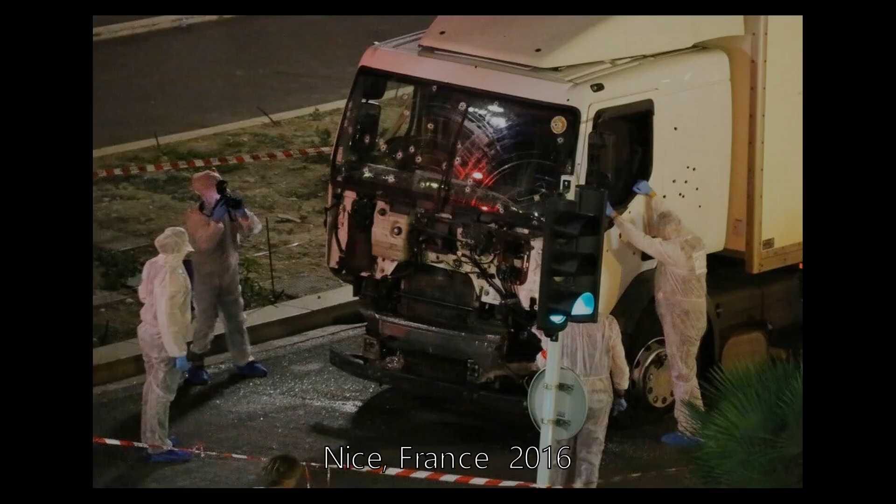July 14th, 2016, Nice, France, 10:33 p.m. A white 19-ton cargo truck is deliberately driven into crowds celebrating Bastille Day, killing 87 and injuring 458 people.

This tragic attack is not isolated. It is known as a VAW, or Vehicle as a Weapon attack, and we can cite many more examples over the past decade, including Berlin in 2016, London and Barcelona in 2017, and an example closer to home, Toronto, specifically on Yonge Street in 2018.

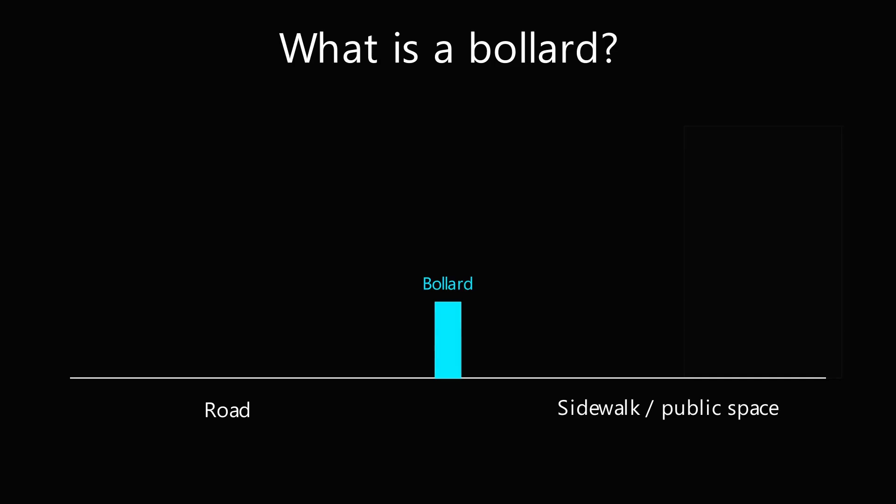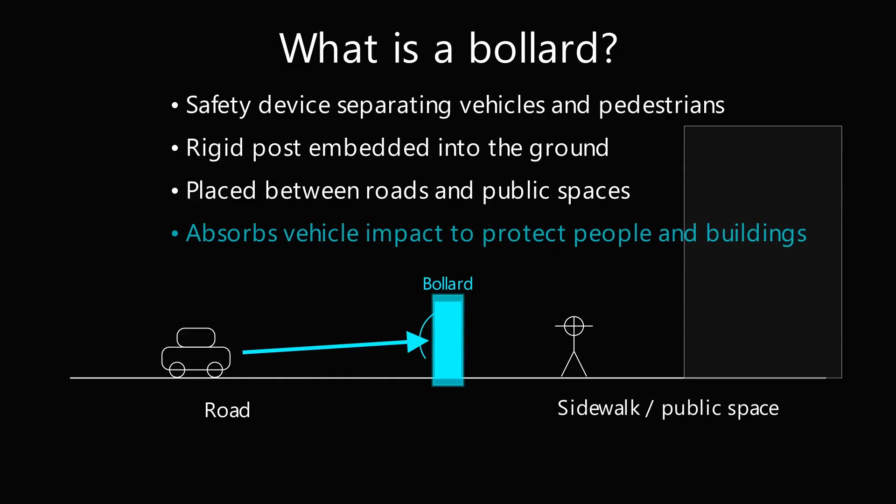One of the simplest ways to mitigate these attacks is by surrounding public spaces with bollards. A bollard is a safety device that protects pedestrians from vehicle traffic, usually a pole embedded in the ground between a road or parking lot and a sidewalk or public area with foot traffic. The idea is that the bollard will absorb the impact of the vehicle's collision and stop the vehicle from damaging buildings or hurting people.

Bollards can be made out of various materials based on various factors such as the number of uses, the impact force to be withstood, the conditions the bollard would be exposed to, etc.

Bollards are sometimes made out of concrete, but concrete is highly brittle, has poor energy absorption, and its quality tends to be variable because of mix, curing, cover depth, and rebar placement in the concrete.

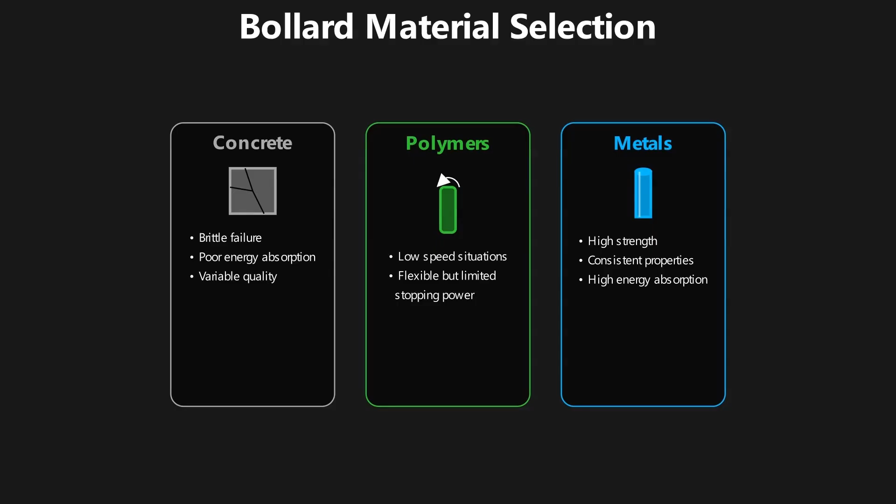Polymers, on the other hand, tend to be for low-speed situations. They tend to deform and then get back into place below a certain speed. Therefore, we are conducting our study on metal bollards.

Several standards define vehicle impact performance for bollards, including ASTM F2656, F3016, IWA14, and the legacy U.S. Department of State K ratings: K4, K8, K12.

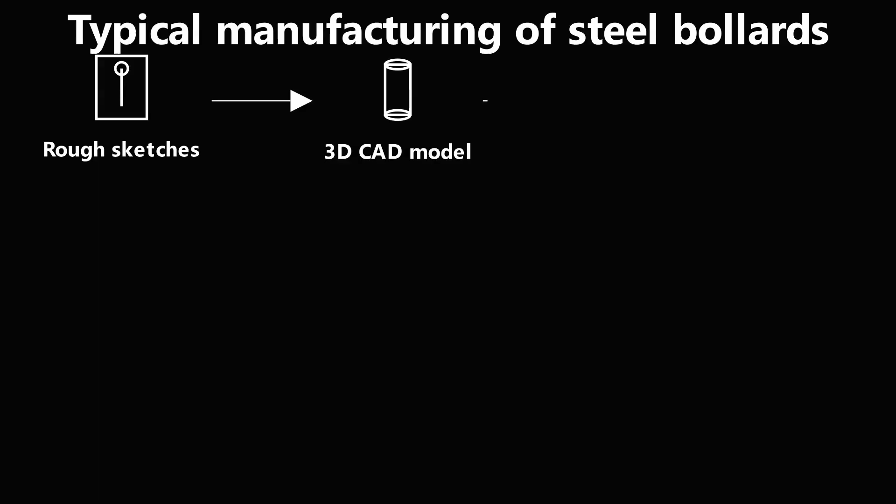The design phase of bollards is pretty typical, starting with rough sketches, moving to 3D models. Then, after the prototype withstands the proper impact resistance and load testing, the bollard is manufactured.

The steel pipe is usually the raw material. The base, cap, and fixture are usually machined and MIG welded to the pipe. The bollard is then inspected for quality. Finally, the bollard is galvanized and given a powder coating for corrosion resistance. Lastly, depending on the application of the bollard, a layer of bright paint is added for visibility.

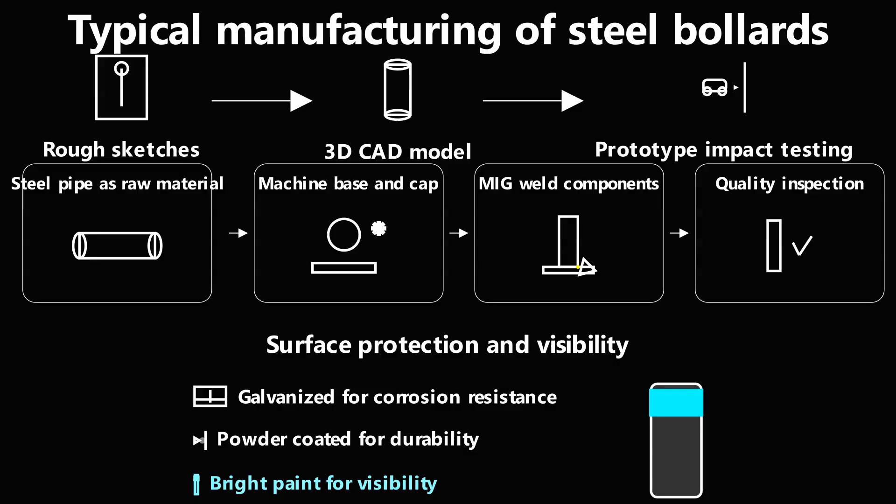We will be investigating this bollard from Ontario Bollards, which is made from AISI 304 stainless steel, and analyzing other metals to try and find the ideal one, based on our simplified models and calculations.

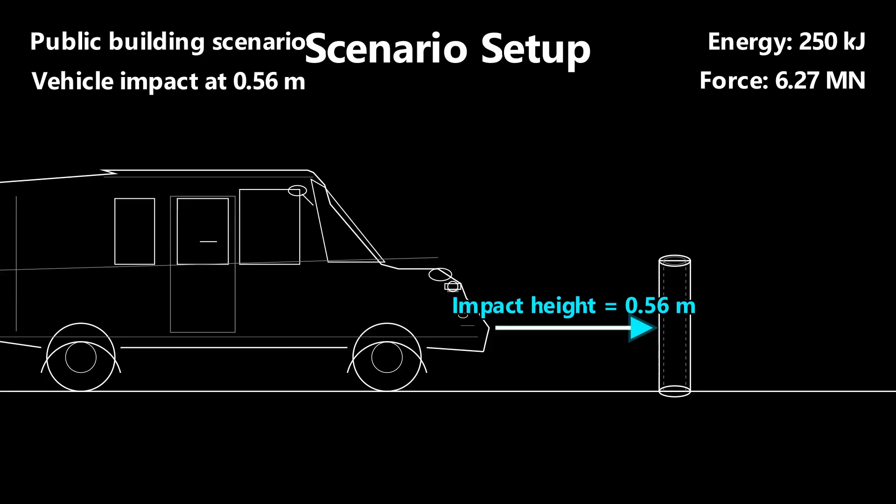Thickness is going to be our free variable, meaning it will vary depending on the material selected. All other dimensions are the same as the Ontario bollard, so height is 0.9 meters and diameter is 0.275 meters. A typical Mercedes Sprinter, a common truck, has a bumper height around 0.56 meters, so that will be our impact point.

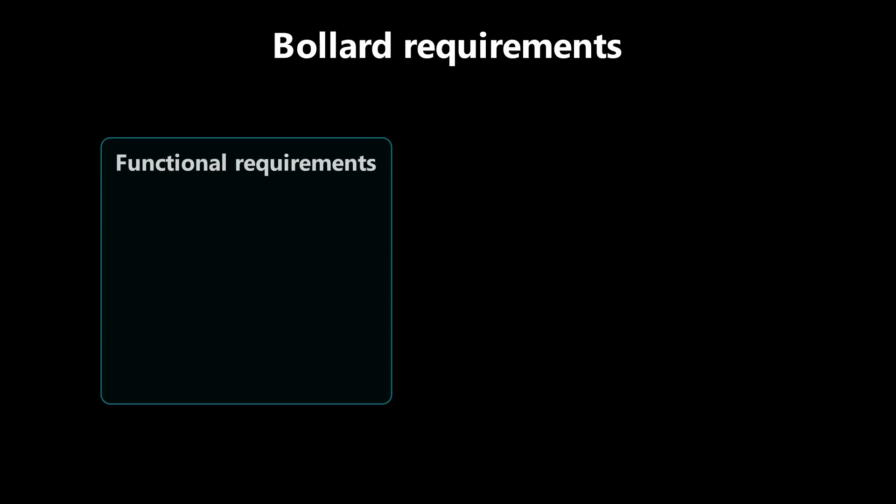We will ignore the material encased in concrete and assume a fixed base. In terms of functional requirements, a bollard must be able to stop a vehicle from penetrating an area while still allowing pedestrians through. They must be high visibility to minimize unnecessary crashes, and also be able to stay outside exposed to the elements for a significant amount of time without corroding.

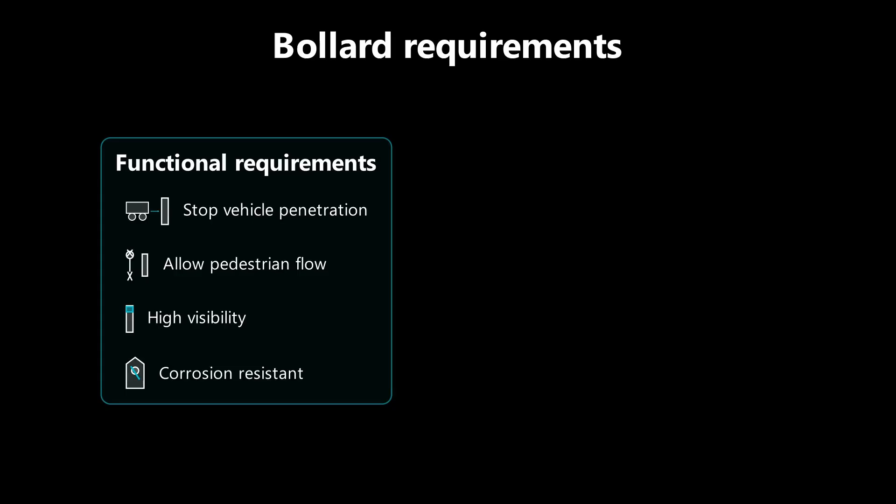For non-functional requirements, the bollard should not take up too much space, be safe, match the environment aesthetically, be as cheap as possible, recyclable, and have as small an impact on the environment as possible.

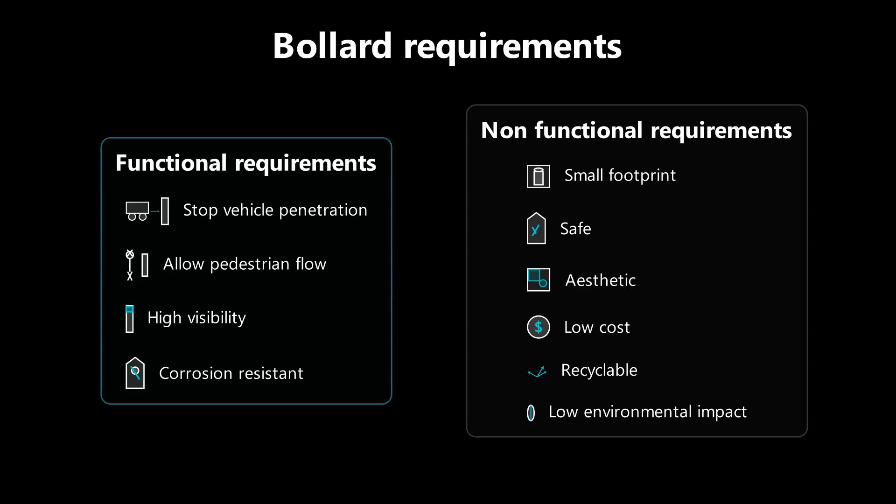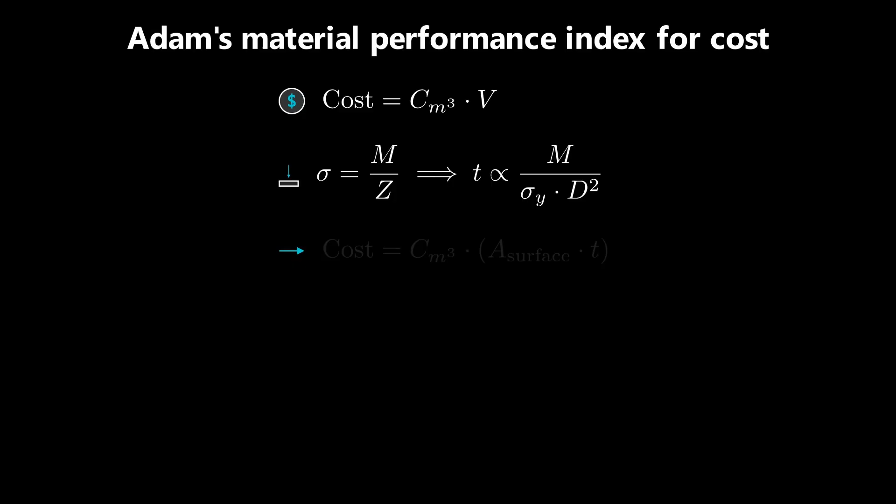The cost model of our bollard: we have that cost equals the material constant of cost per meters cubed times the volume. Rearranging the formula for bending moment gives us T, which is our free variable thickness, which we can sub into the volume of the cost equation.

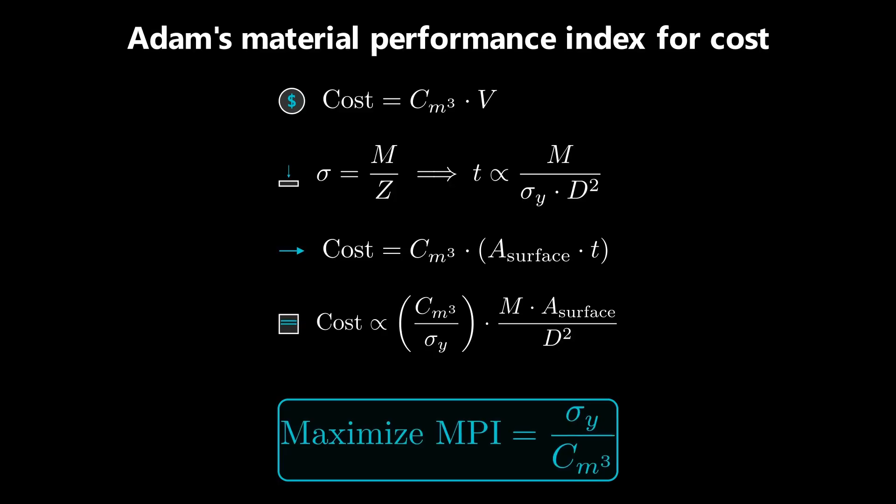Putting in the material constants gives us an MPI of cost per meter cubed over yield strength that we are trying to minimize. If we are trying to maximize, as shown on the Granta plot, we will flip our MPI to yield strength over cost per meter cubed.

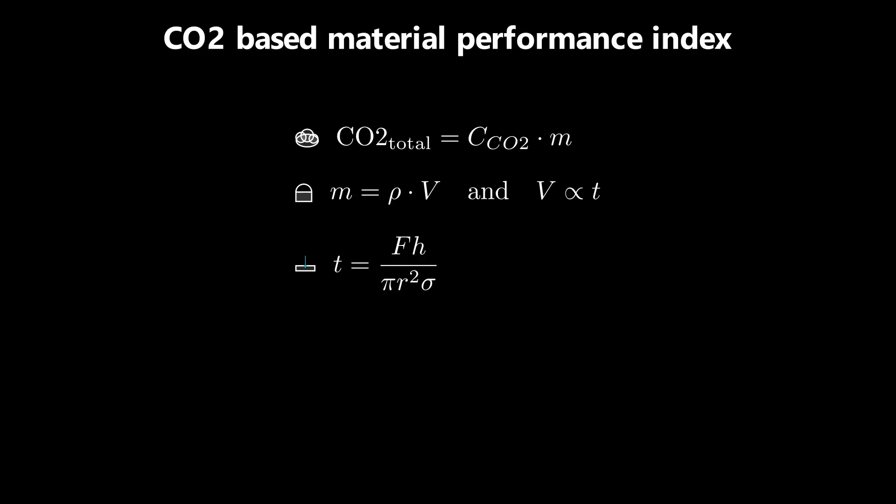We also want to minimize the kilograms of CO2 output and maximize the bending stress by rearranging the formula of bending stress for a free variable thickness and subbing that into the formula for kilograms of CO2 output. We can see that the MPI is the material constant in kilograms of CO2 per kilogram, which is divided by the stress.

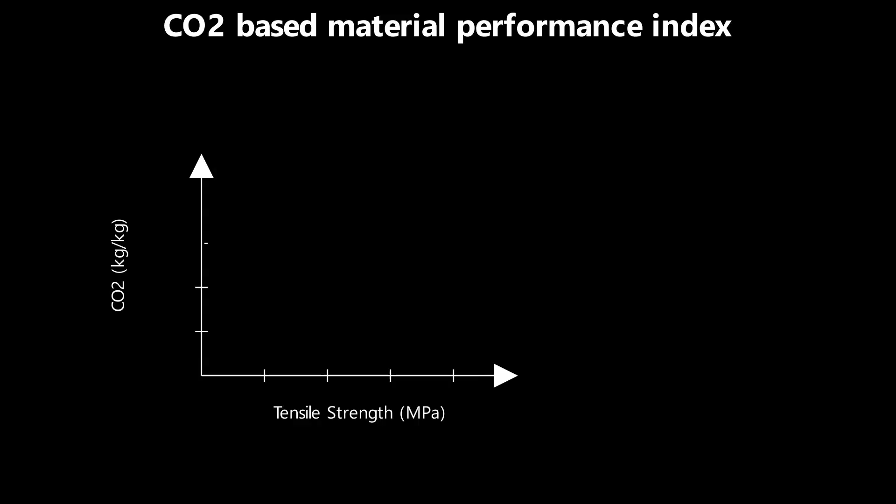Since density is dependent on the material but not relevant to a bollard application, the critical value cannot be determined, and the MPI line was set where it could eliminate many materials but leave options open for other MPIs to narrow down. We want to maximize the ratio between stress and strain, or Young's modulus, and also maximize the yield strength of the material.

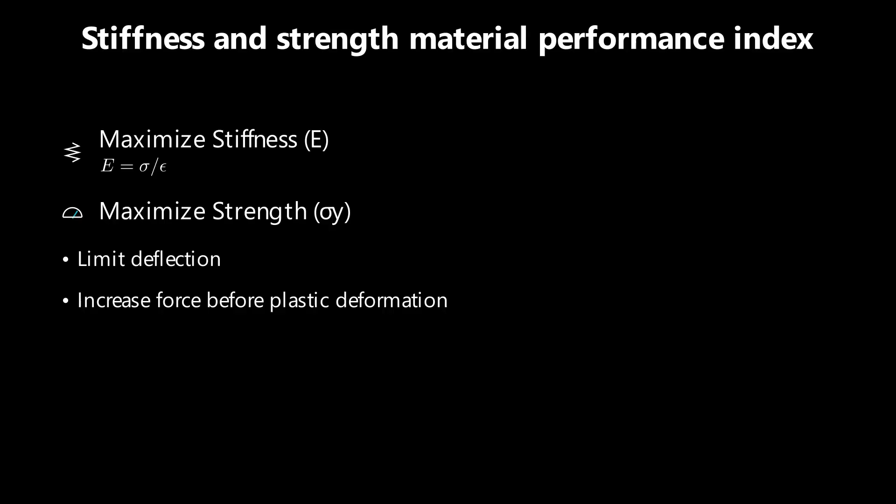This will limit deflection and increase the amount of force that can be applied before plastic deformation. By rearranging the equations for elastic strain and bending, we get that the MPI equals yield strength squared over Young's modulus.

There are also durability requirements necessary for an outdoor metal object. We applied additional requirements around the material's resistance to freshwater, saltwater, organic solvents, weak acid, and UV radiation. It should also be unflammable and recyclable.

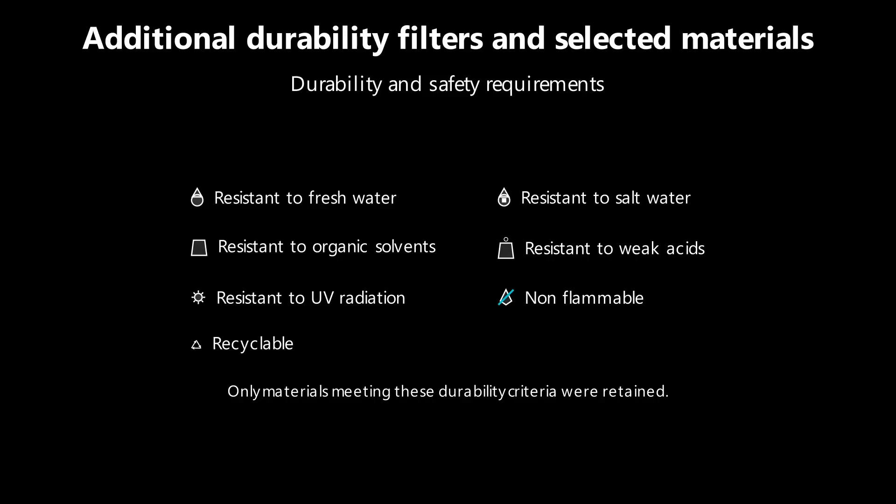After considering these MPIs, multiple thousands of materials were narrowed down to 300. These 300 materials were ranked by yield strength. Filtering out identical materials with different heat treatments left us with the following list.

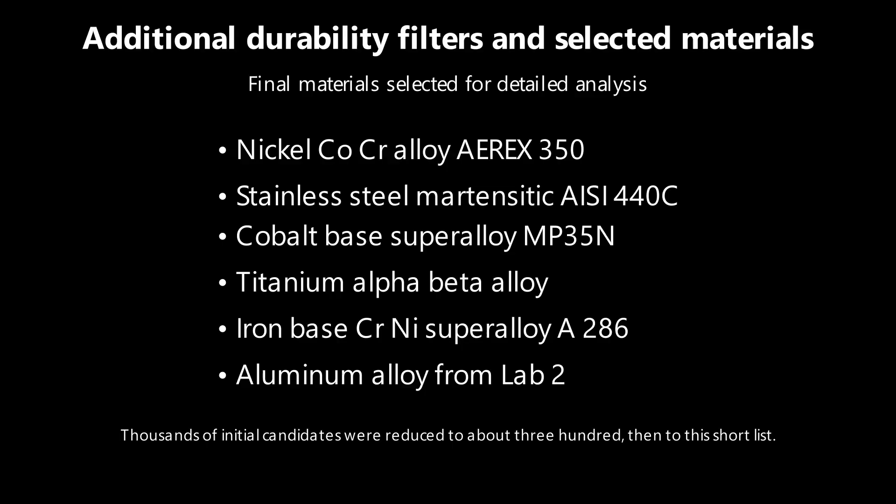Nickel cobalt chromium alloy AEREX 350, stainless steel martensitic AISI 440C, cobalt based superalloy multiphase MP35N, titanium alpha beta alloy, iron-based chromium-nickel superalloy A286, and finally, the aluminum alloy from Lab 2.

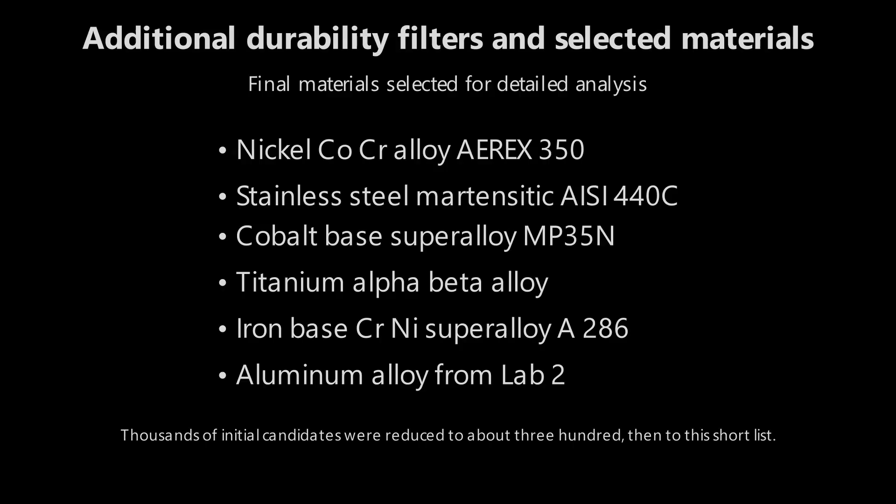The nickel-cobalt-chromium alloy contains 45% nickel, 25% cobalt, 17% chromium, and less than 5% of a number of other metals. According to the yield strength MPI, T needs to be 7.27 mm. According to the bending stress MPI, T needs to be 40.5 mm, or around 4 cm. And according to the stiffness MPI, T needs to be 2.8 mm.

Taking the maximum value of 40.5 mm, we calculated the cost to be $17,823.9 and a CO2 output of around 4,926.01 kilograms. The best heat treatment for this nickel alloy to maximize strength was found to be 53% cold reduction, then aging it at 538 degrees Celsius for 4 hours.

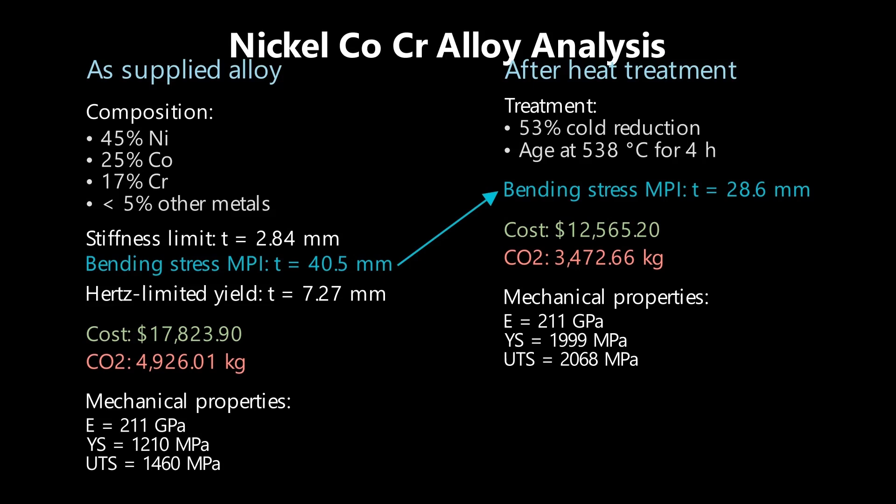After this, the bending stress MPI allows a T of 28.6 mm, which lowers the cost to $12,565.2 and a CO2 output of 3,472.66 kilograms. Martensitic stainless steel 440C is 78% iron, 16% chromium, and 1.2% carbon, and then less than 1% a number of other metals.

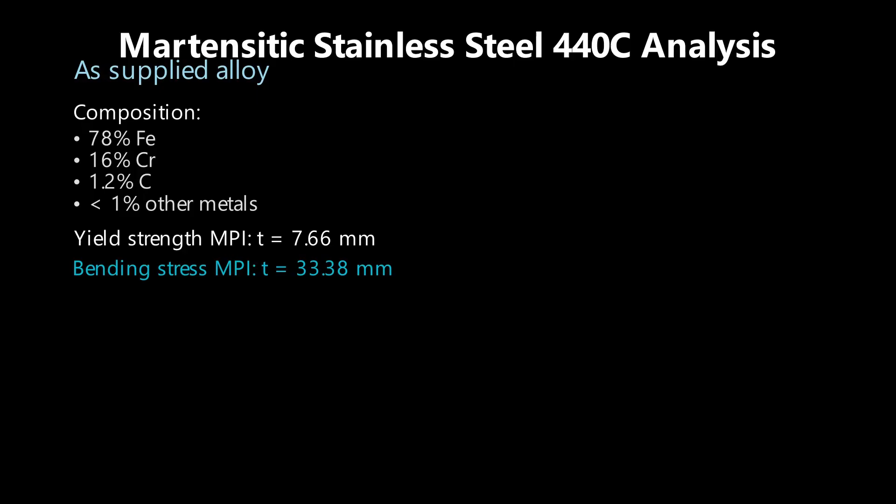Solving the yield strength MPI for T gives 7.66 mm, bending stress MPI gives a T value of 33.38 mm, and the stiffness MPI gives a T value of 3.15 mm.

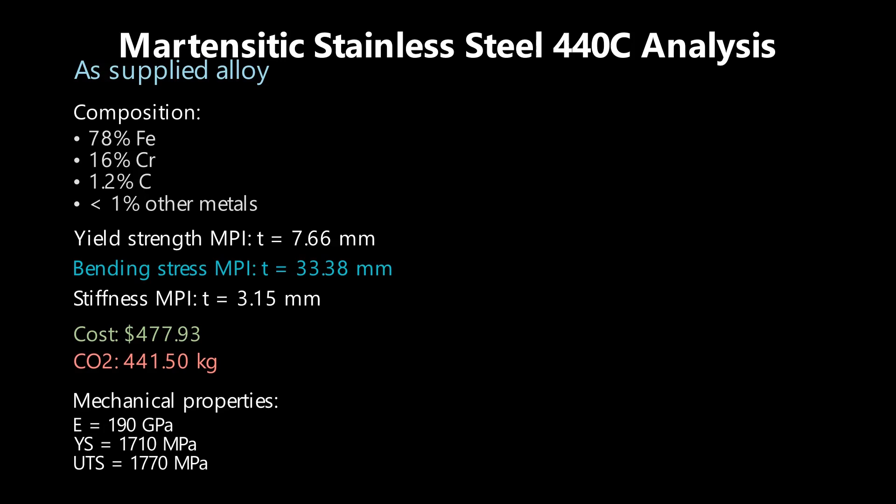Taking the maximum value of T to be 33.38 mm, the cost is equal to $477.93. The CO2 output is equal to 441.5 kilograms.

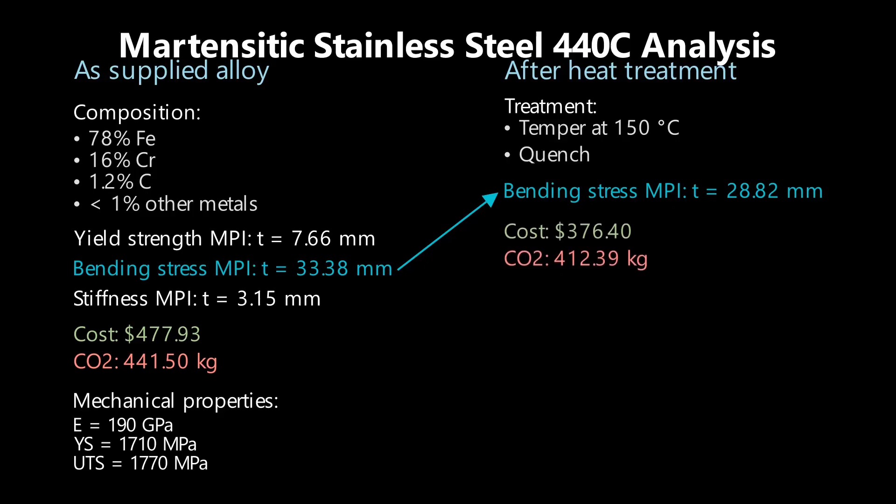The best heat treatment to maximize strength is tempering at 150 degrees Celsius, then quenching it. After this, the bending stress MPI gives a value of T equal to 28.82 mm. This lowers the cost to $376.40 and the CO2 output to 412.39 kilograms.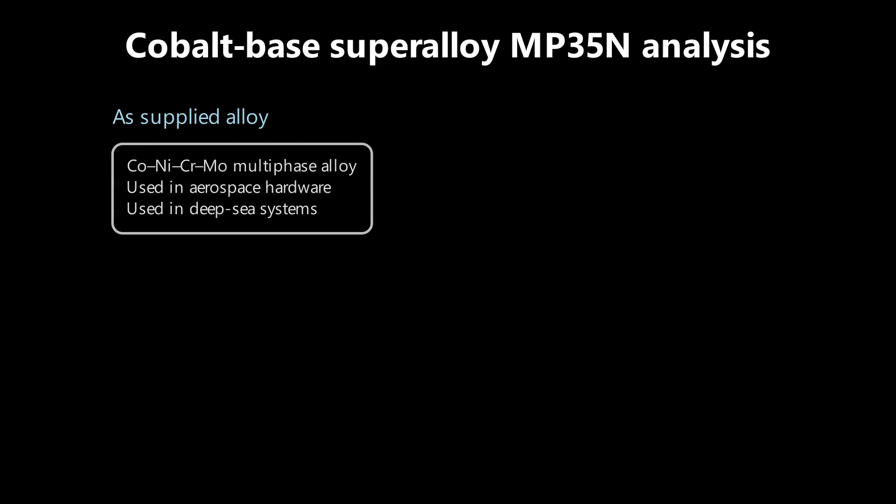The next selected material is cobalt-based superalloy, MP35N. This is a multi-phase cobalt-nickel-chromium-molybdenum alloy, often used in aerospace or deep-sea applications. The MPIs give a thickness value of 2.5 mm, which results in a cost of $9,900 and a CO2 output of 3,800 kilograms. To maximize the strength of MP35N, the recommended treatment is age hardening after heavy cold work.

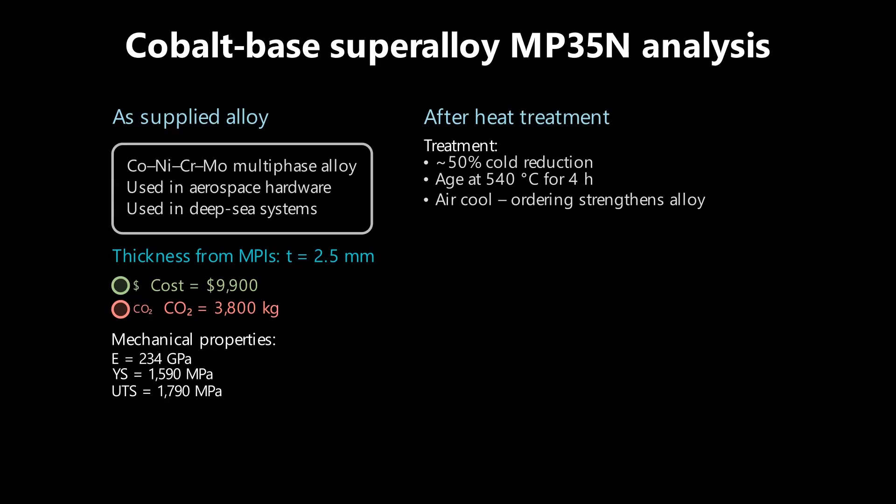The alloy is typically cold reduced by about 50%, then aged at around 540 degrees Celsius for 4 hours, followed by air cooling. This ordering and precipitation process increases the strength significantly. After aging, the bending stress MPI gives a required thickness of 1.9 mm, which lowers the cost to approximately $8,000 and CO2 output to around 3,400 kilograms.

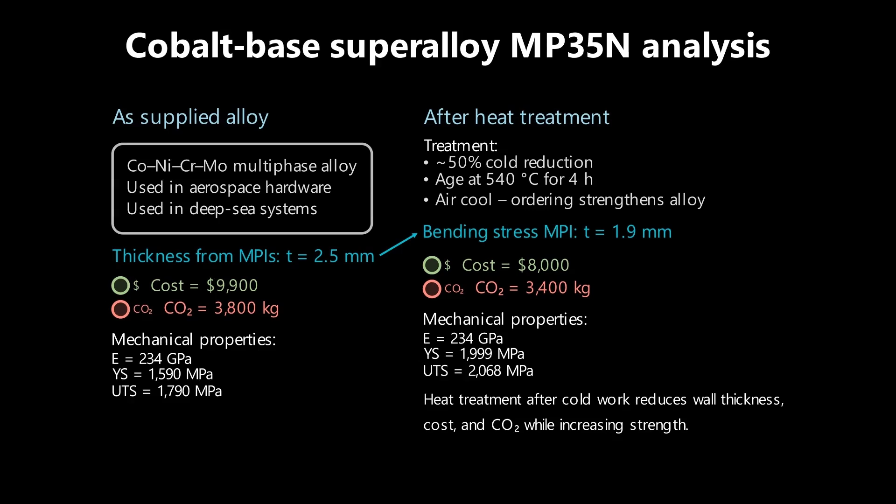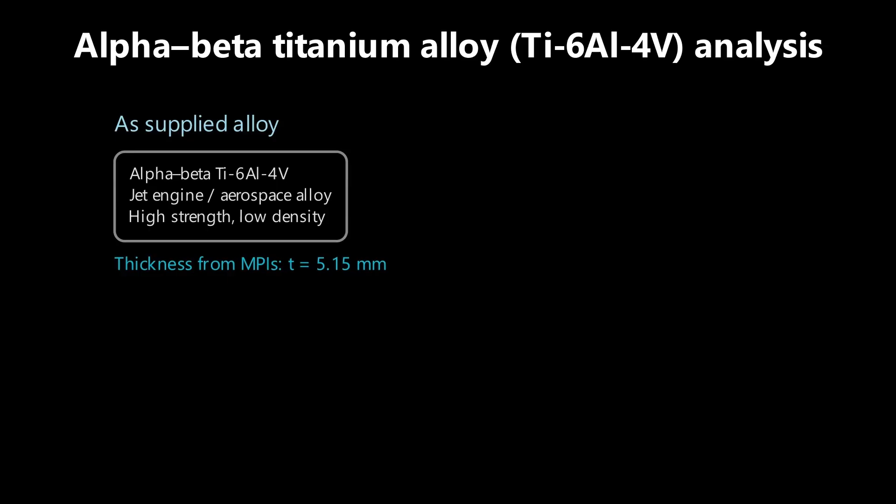This alloy is an alpha-beta titanium alloy often used in jet engines. Plugging in the material values into the MPIs gives a thickness value of 5.15 mm. This results in a cost of $3,900 and a CO2 output of 1,900 kilograms.

Titanium alloys typically gain strength through solution treating and aging. The alloy is heated to the beta or alpha plus beta region, held to dissolve retained phases, then quenched. A final aging step at moderate temperatures precipitates strengthening phases and recovers hardness.

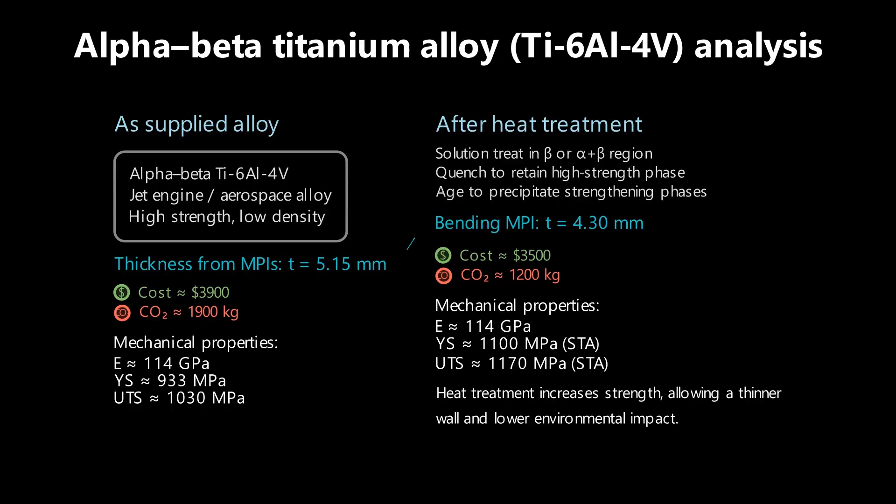After heat treatment, the bending stress MPI gives a required thickness of 4.3 mm, which reduces the cost to roughly $3,500 and the CO2 output to around 1,200 kilograms.

The next material to be analyzed is an iron-based superalloy composed of 50% iron, 25% nickel, 15% chromium, 2% titanium, and minor amounts of other metals.

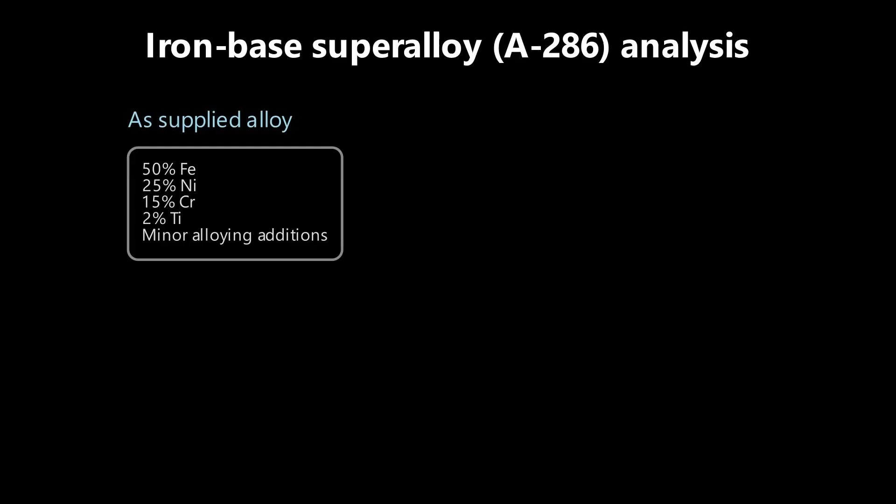Plugging in the material constants to our MPI equations gives us a thickness of 3.34 mm, which results in a cost of $2,103.57 and a CO2 output of 1,095.57 kilograms.

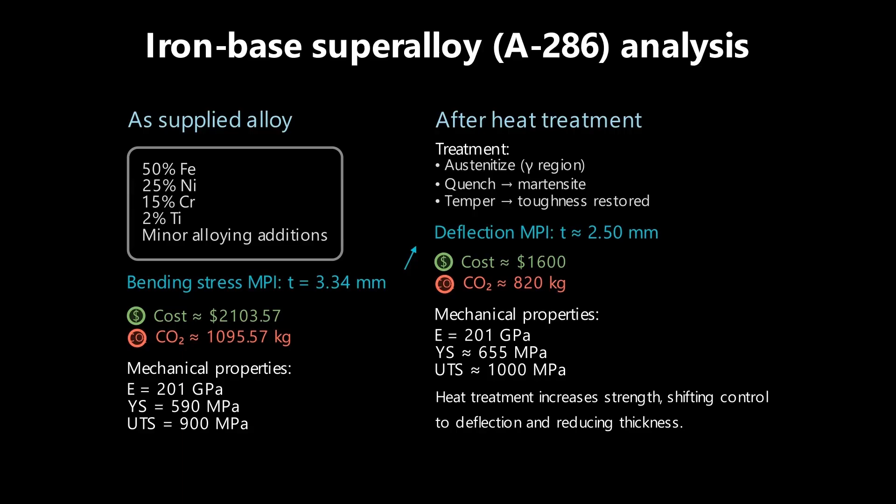After this heat treatment, the higher yield strength means bending stress is no longer the limiting case, so the design becomes controlled by the deflection constraint. The required wall thickness drops from 3.34 mm to about 2.5 mm, and because cost and mass both scale with thickness, the estimated cost falls to about $1,600 and the CO2 output drops to roughly 820 kilograms.

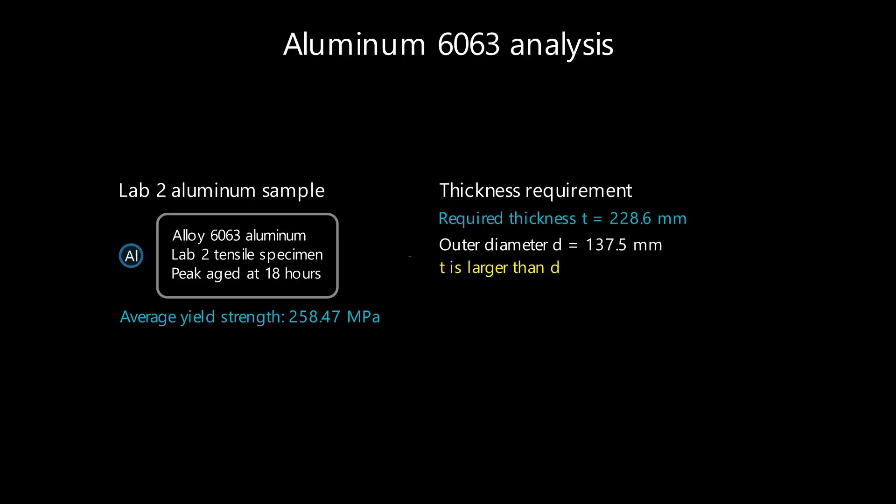Lastly, in Lab 2, we analyzed a 6063 aluminum sample, taking the average yield strength for each aging length, showed that 18 hours of aging resulted in the highest average yield strength of 258.47 megapascals. Plugging this value into our free variables gives a T value of 228.6 millimeters, which is much bigger than our diameter of 137.5 millimeters. Therefore, aluminum is not a viable option.

Based off our material selection and analysis, it can be seen that 440C stainless steel has the lowest cost and CO2 output, while still meeting our strength and bending requirements.

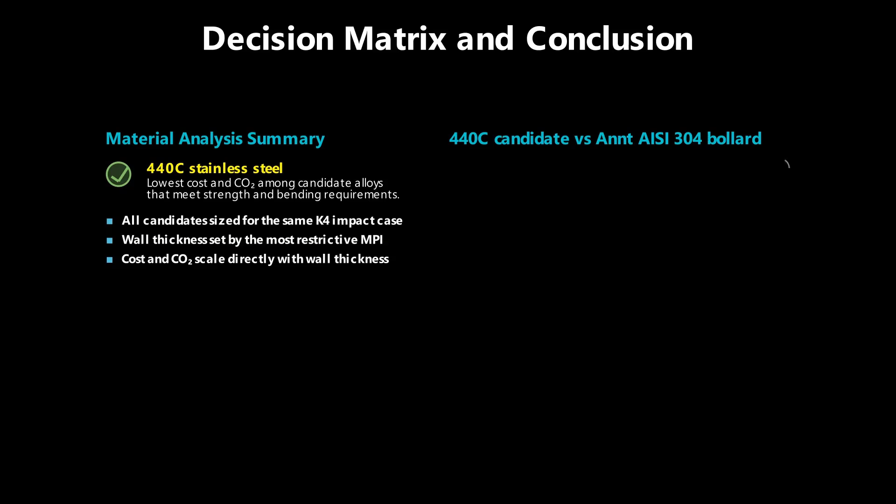Comparing it to the current steel used by Annt, we have concluded that while they are very similar in cost and CO2 output, Annt's Bollard has a slightly lower thickness and as a result, lower cost and CO2 output, meaning it is the best choice for this application.

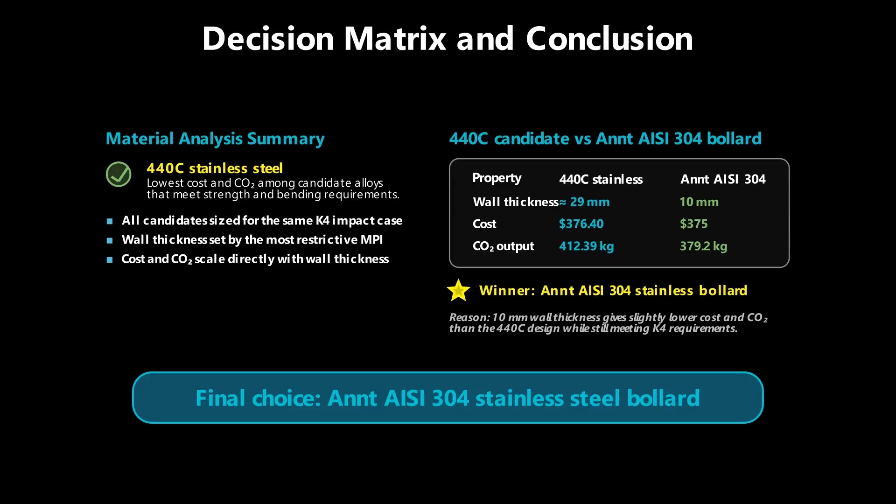This could be due to the fact that Annt buys raw materials in bulk from suppliers that give them a better price on their batches compared to market price.